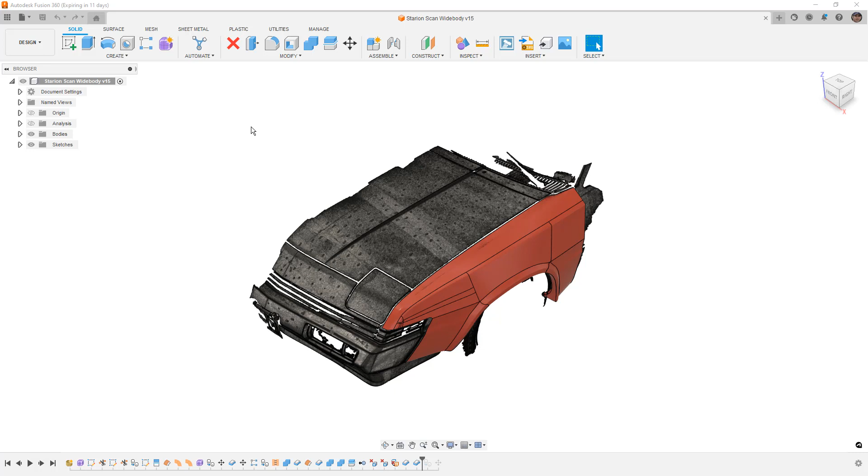I do also want to talk about the fact that at some point in the videos, I did mention that I might just use the 3D print as the fender. That's not going to be the case. I've found that too many different pieces is just not going to be a good solution. However, it is good to glue them together, skim them with body filler, and then build a fiberglass version based off of the 3D print. So that's something to keep in mind, that if you're making smaller pieces, then you can likely get away with 3D printing, especially if it's multiple pieces.

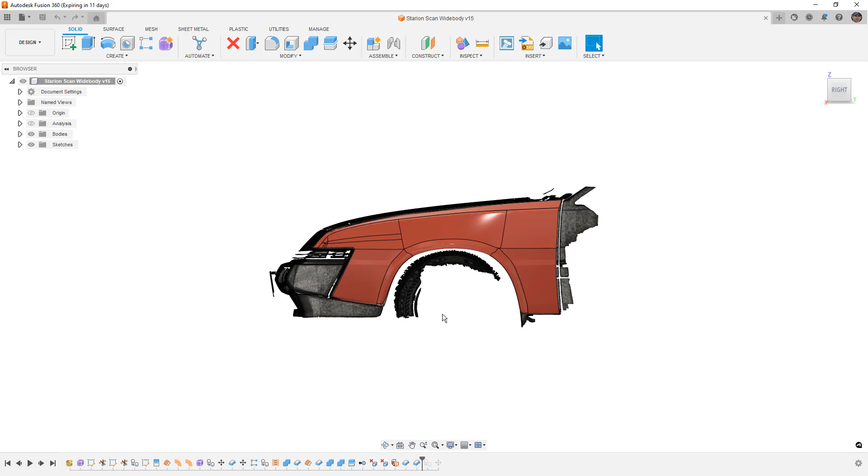Something this big that is essentially structural. I mean, it's not structural in the nature of the car, but it needs to be self-supporting. I don't feel great about having all the different seams on the part. It's just not going to survive, especially talking about two on the front, two on the rear. It's just not going to be a good solution for me for this part.

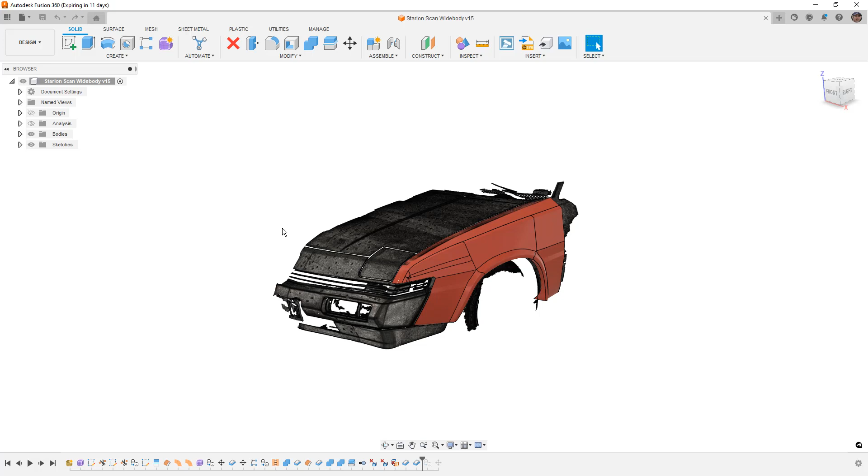And we're going to get started by first going to the bodies folder, and we're going to turn the full fender into its own component by going to right click and create component from bodies. Now, a couple of reasons that we want to do this. One of the reasons is if you happen to be using Fusion 360 as your slicer, which I did print some of these pieces directly from Fusion, then having them as components is important for the arrange functionality to be able to place multiple pieces on the build platform, but also for things like per body presets in the manufacturing workspace. So those are things that are going to be important.

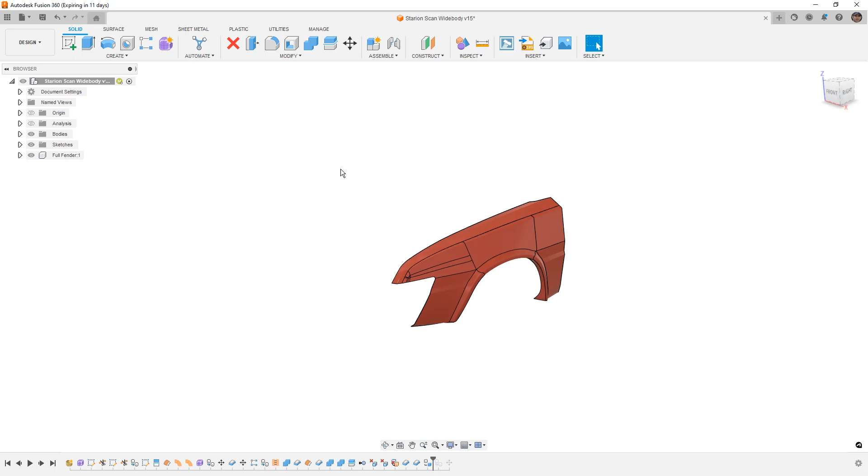If you are exporting this to a slicer, I've printed the rest of the pieces using the Creality slicer, then having components is really kind of, you can take it or leave it. There are helpful things, especially once we start adding features to each of these parts, to having them as components. So I will talk about that in just a little bit, but keep in mind that the main reason for this is if you're using arrange, they need to be components. And when you're working in the manufacture workspace for additive manufacturing, components are preferred over bodies if you're trying to build multiple pieces onto the build platform.

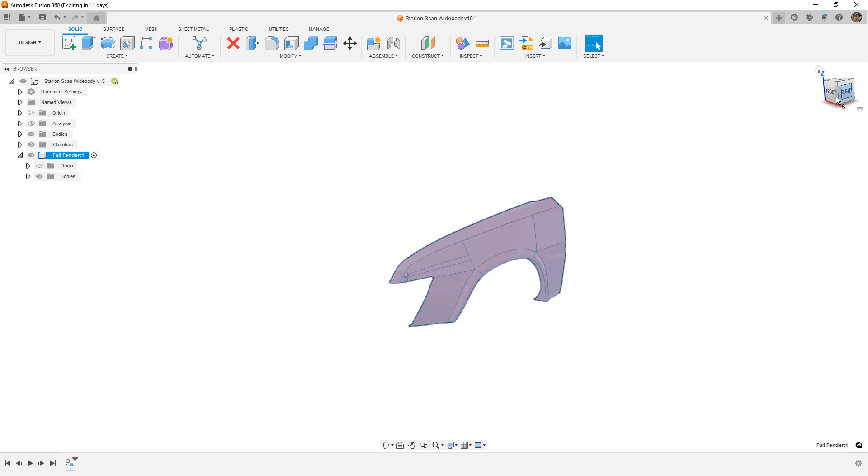With that out of the way, I want to talk about two main ways that we can split this up. So I'm going to begin by activating this component, and I'm going to talk about using a volume to just keep an intersected portion of the fender, or by splitting it up with sketches. So if we're going to use a volume, what we want to do is go to create and either create a sketch and an extrude, or just use the box primitive.

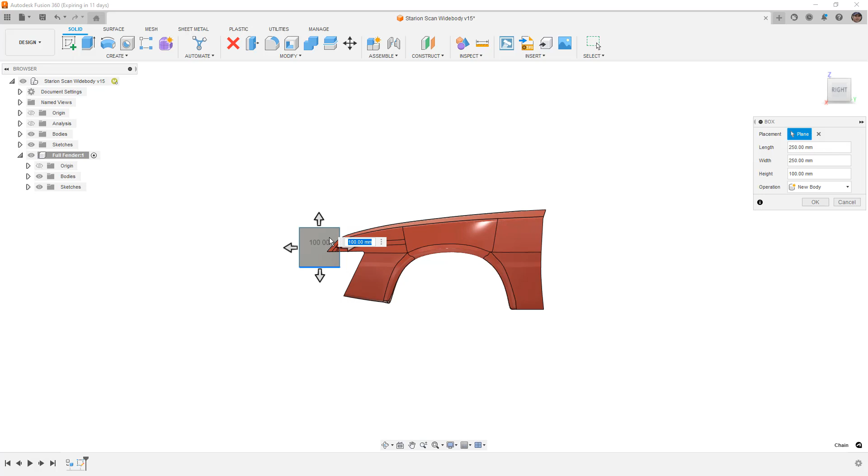The box primitive will allow us to pick a volume, let's say 250 by 250. Now, in this case, I'm using a Creality Ender 7, which has a build volume of 250 by 250 by 300. That's not the size that I would want to print, and I did try it, and it does cause problems. So I would suggest making it just a little bit smaller than your printer. So what we would do then is we would turn this body into its own component. Now, the main reason for that is because when we right-click and we change the opacity to, say, 20%, nothing happens.

Now, if we activate the top level, you can see that the opacity now does change. And the reason for that is because when we activate a component, the opacity of everything else changes, and the opacity of these components needs to be at the top level. So if we right-click and we turn this into its own component, then at the component level, we can change its opacity, and now we can see through it.

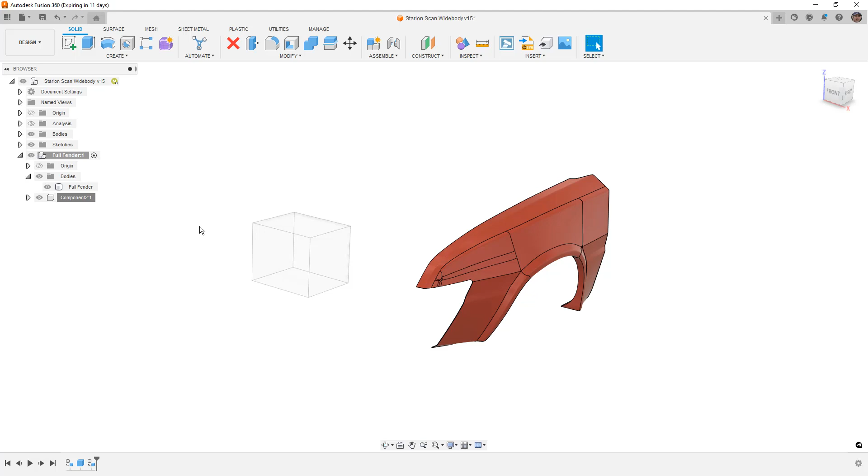So at this stage, what I would do is I would move it around. I would potentially use move copy or rotate. So for example, if I select this component, hit M on the keyboard or select move copy, maybe rotate it 90 degrees. So that way the long direction is along the fender. And then I can just simply move it into place.

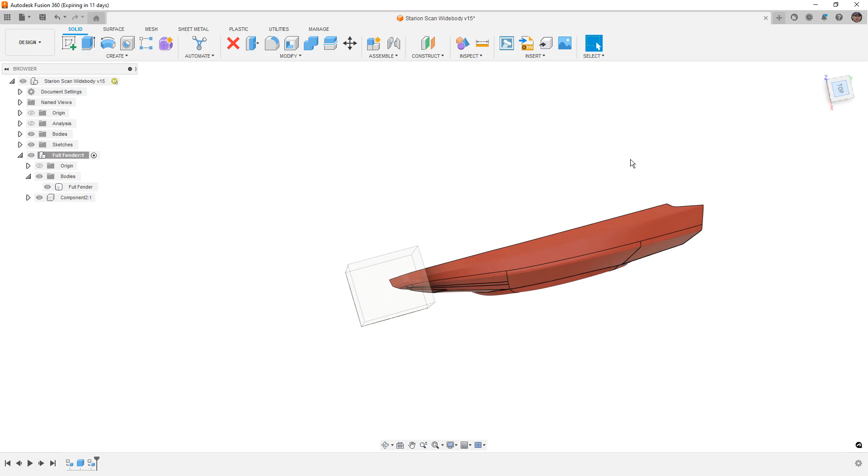Now what we're looking for here is we're looking to build an overlap between the solid. We can pattern this and we can create the whole grid of these that would allow us to ensure that each piece fits inside the build volume. Now the way that we would turn this into just that piece of the fender is we can either use combine or we can use create and boundary fill.

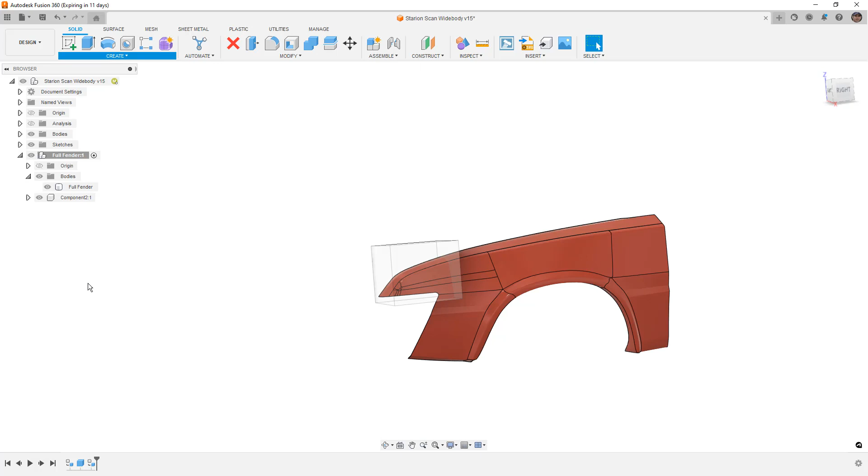Now I have noticed that there are problems with create and boundary fill. So what I'm going to do is I'm going to select both pieces and I'm going to show you. When we go to select the cells, it doesn't let me select this other cell. Now, for whatever reason, this has been broken in Fusion for just a little bit. If you are using boundary fill and you want to keep that inside piece, what you need to do is hold down the left mouse button, and inside of this sort of phantom menu, it changes which component is being highlighted. So you'll need to select whichever one is highlighted for you to keep.

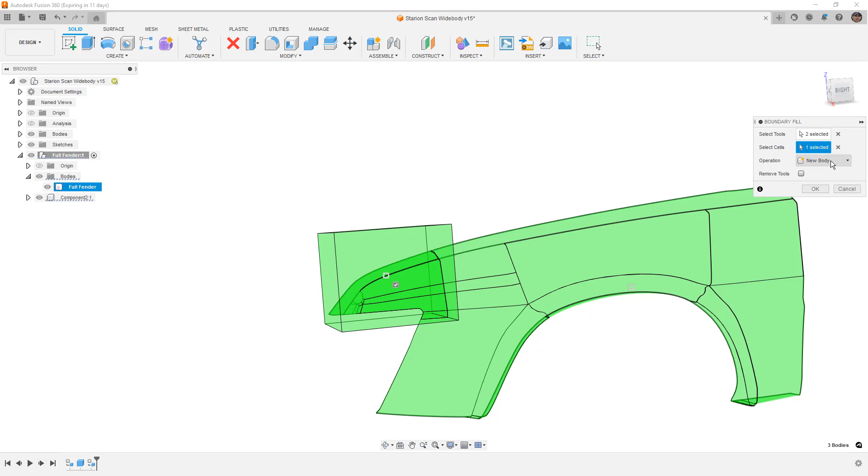Now, the way that boundary fill works is it lets you use things like solid bodies, surfaces, and planes, and you can combine them all to create a new body. We can cut away, we can keep just the intersection piece. But essentially what we're doing is we're building out just that one piece of the fender. So you can see that it's its own little piece, and we still have the full fender left behind. We also still have the cube left behind, but this gives us one piece to work with.

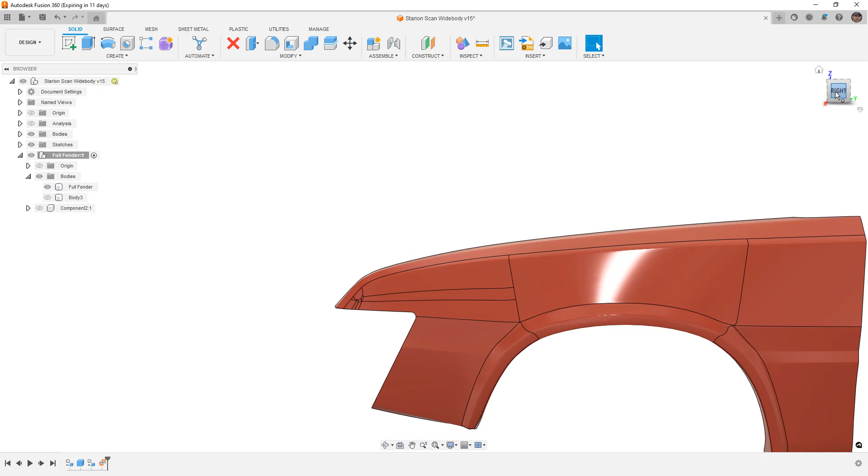Now, as I mentioned, this is not the way that I would break this up. It's just simply not the most efficient way, and I end up with a lot of extra solid bodies in the design, and I really don't like using boundary fill unless I absolutely have to. So the way that I would break this up is by creating a sketch, and I'm just going to create a couple of sketch lines. So I want to create a vertical line that's taller than the fender, and then a horizontal line that is longer than the fender. I'm going to hit escape to get off my line tool, and then use a pattern.

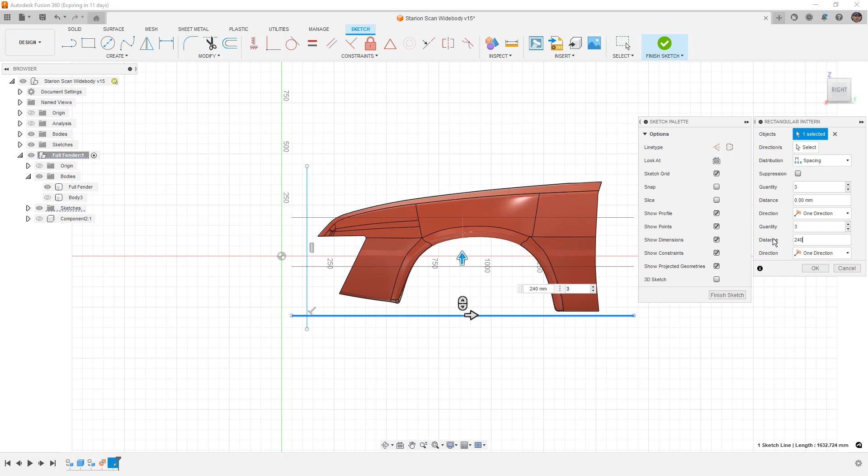Now for the pattern, we want to make sure that we spread these out using a spacing distribution and based on the size that we want. So 250 is sort of the length or width of my printer. I'm going to do a little bit smaller, 240, increase the number, and then say OK. I'm going to right click and repeat this using this vertical line, begin pulling it back, and again, spacing, I'm going to do 290 instead of 300. And just increase the quantity until I get out of the back of the part.

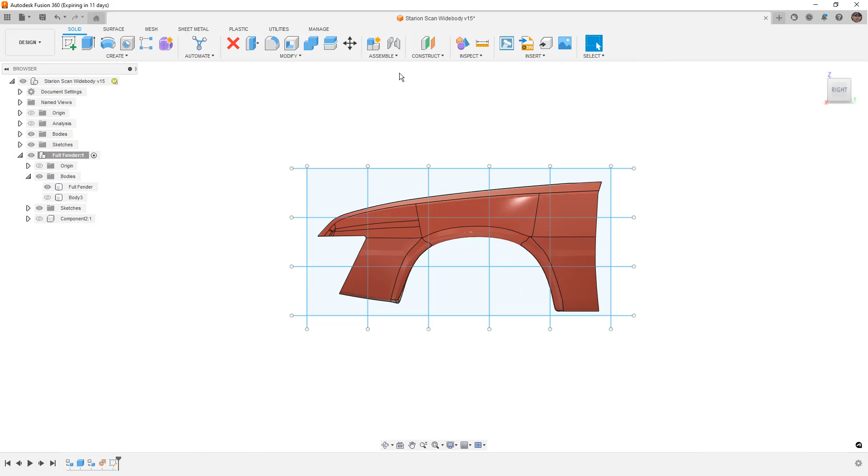What this allows me to do is use this sketch to split up the solid body. Using the split body tool, I can select the fender, and then I can select the splitting tools I want. I'm going to say OK, right click and repeat. I need to bring my sketch back, but this time I'm going to select the 4 pieces that are left behind, and my splitting tools are going to be these vertical lines, allowing them to extend, and say OK.

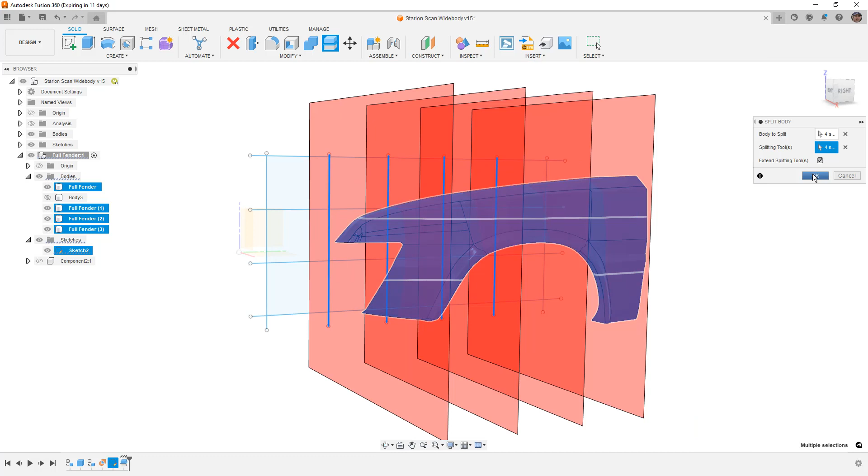Now you do need to be careful with this. I've noticed that sometimes it works and sometimes it doesn't. And what I found is that when it doesn't, it fails. It says there's no overlap or intersection. What you want to actually do is go back and just try to split the body up with one line at a time. See if that works. You might need to potentially move them around.

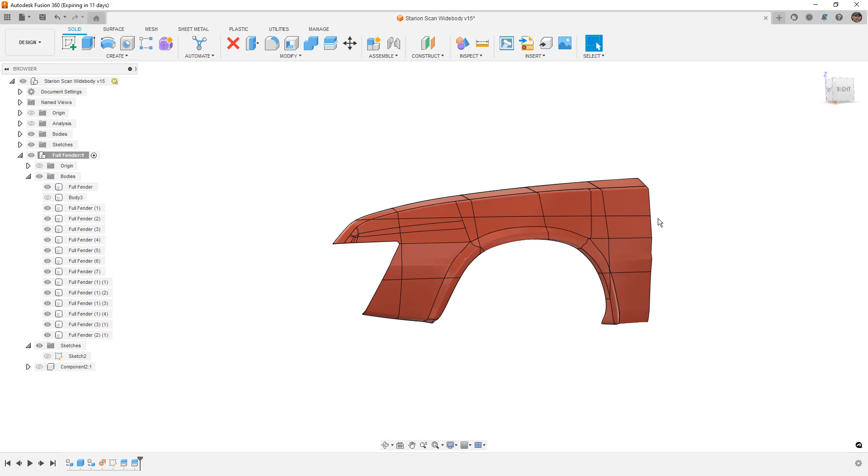But now that we have all of these extra pieces, what I want to do is select all of them, right click, and create components from bodies. The main reason that I do this at this stage is because I can now use display component colors, and it'll change the color of each component in this design.

This makes it really easy for me to look over here and see the color, see which component it is, and visually I can just tell I've broken this up. I didn't skip anything, I didn't miss any steps. Now, if I was going to be using this file for the 3D prints, I would likely come back and maybe move the lines around, but Fusion's going to be a little picky about that, and I don't really want to break this, so I'm just going to move forward with it as is.

So what we're going to be doing is potentially renaming or renumbering all of these. For example, this one here, I'm going to call this piece 1. And then moving my way back to the purple one, I would name it piece 2, piece 3, and so on. Renaming these is going to be important, not only at the component level, but at the body level, especially if you're going to be exporting these to another slicer. You would want to make sure that you do know which component is which.

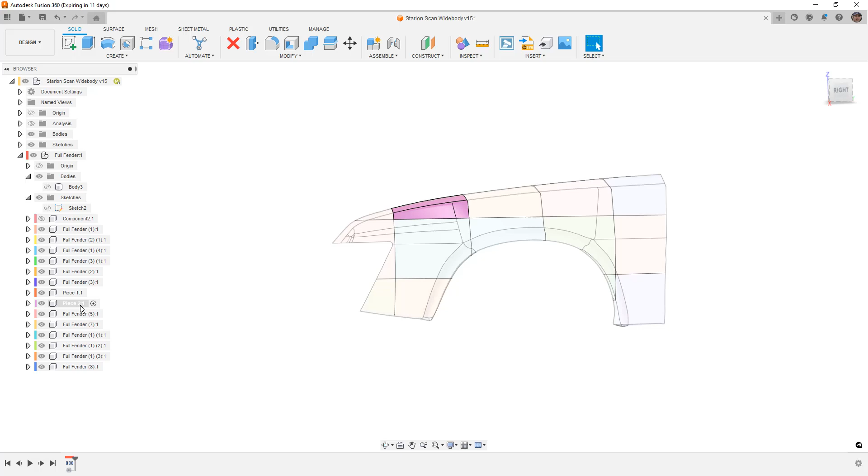Once you've renamed components, it's also extremely helpful to be able to activate them, which again changes the opacity of everything else. We can also right-click and isolate them. This is a really nice workflow. It helps us simplify the process of working with each of these pieces of this fender. As I mentioned, I'm not going to go over all of the pieces because the process is the same. It's just time consuming. So we're going to talk about actually creating some features and the way in which we would want to build this so we could 3D print it.

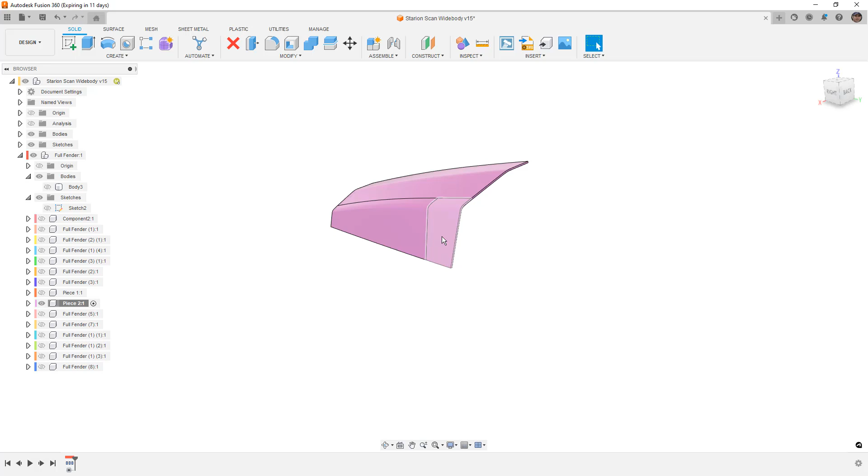Now, it is important to remember that in this case, the part is sitting on top of the fender. So we can't add any additional features, ribs, or details anywhere it's going to have to sit on the car. So keep in mind that we don't have a full area to build. We kind of have to work down in this section here.

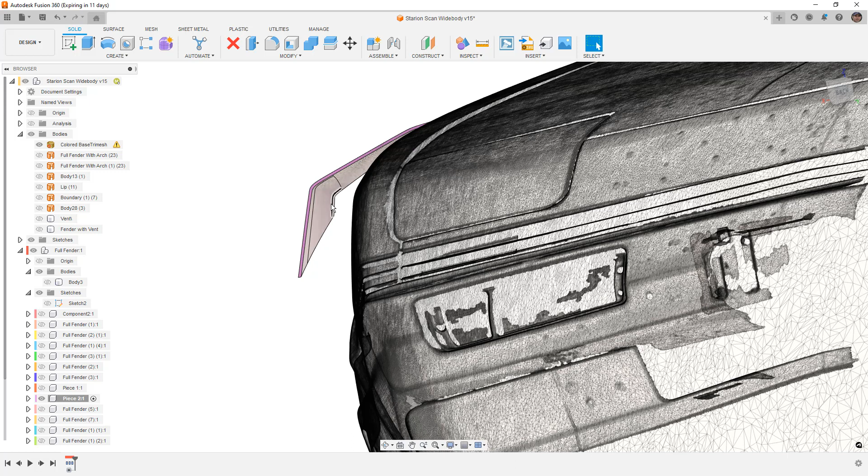Because now it's split up with lines that were going normal to their sketch plane, all of my edges that have been trimmed, this edge here, the bottom edge, and the front edge are all planar, which means that I can just create a sketch right on them. So we're going to right click, create a sketch, double click the mouse to bring it back in view. From here, I'm going to use offset. I'm going to turn off chain selection and just offset this inside edge and bring it in whatever distance we want for a lip or a flange to connect these together.

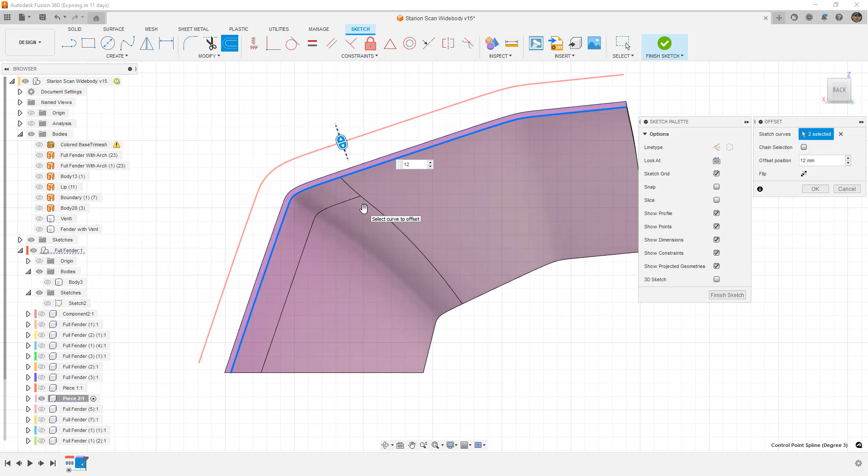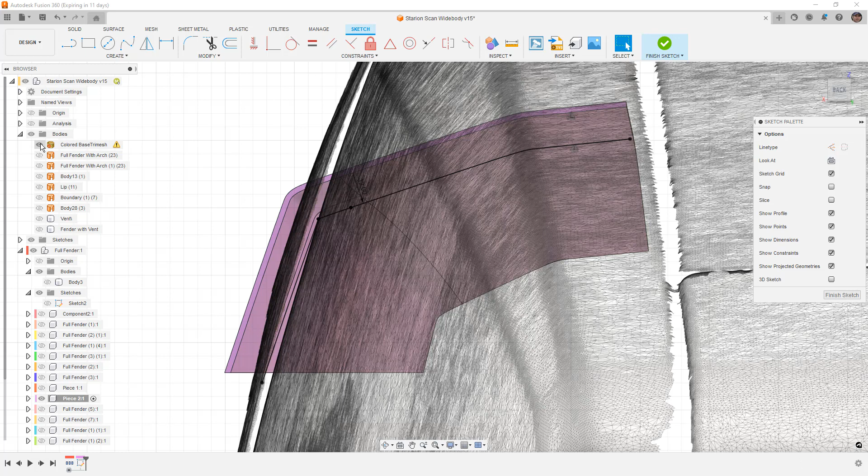Now you have to remember the orientation that you're going to build this in, whether or not you want to add things like pins and dowels, or if you just want to simply screw them together with some sort of plastic screw after the fact, or glue them together. I'm going to be using glue or epoxy to glue them together, and hopefully that will work out okay. If we need to, we can always turn the mesh back on and use slice, which will allow us to slice through the mesh temporarily at that point.

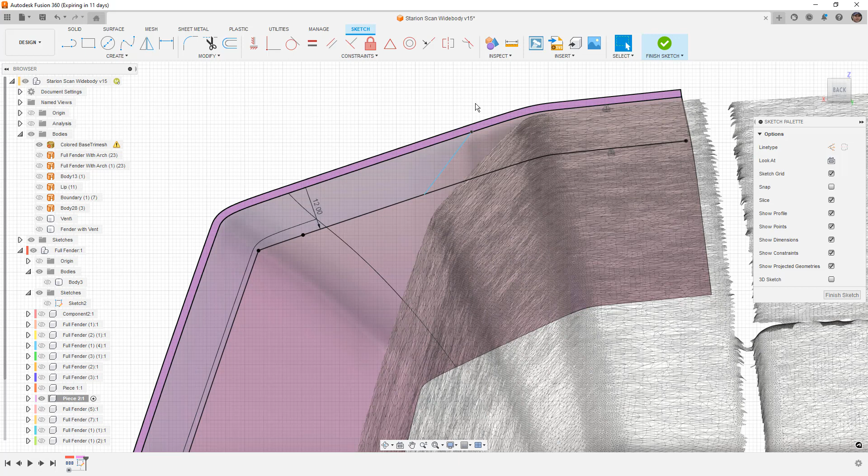And then we can use additional lines. So we want to come out horizontally from here and potentially up here, just come up at an angle that's kind of matching the fender. This gives us an area to just extrude. Now I'm going to add another line that's extending out to here. The reason for that is because now we're able to break these up into those two sections.

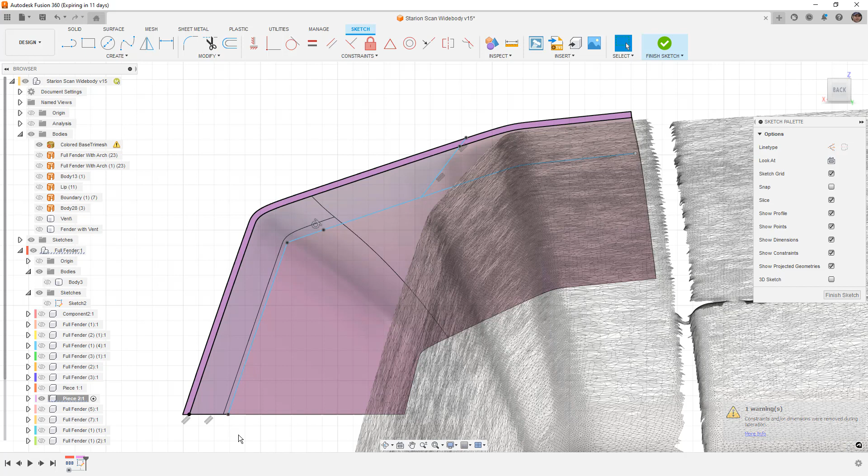I don't necessarily want to worry about trimming these back because these are offset lines. They have a constraint between them. If I trim them, I'm going to end up breaking some relationships, and now I no longer have that offset. You don't necessarily have to worry about maintaining the relationship, but if you want to go back at some point and say, make this minus 10 millimeters, having that still there is kind of helpful. And if you trim that, you're going to break that.

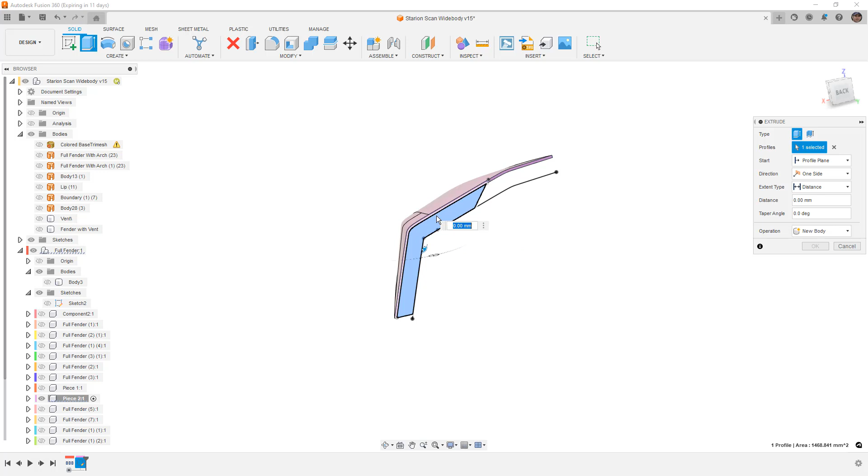So again, it just kind of depends on what you want to do. So I'm going to hide the mesh again, and E to extrude, make sure that I select both of these. And the overall fender is 2 millimeters thick, so I'm going to say -2. By default, it's going to want to cut that away. So you can see it's trying to cut it away.

If we say join, what's going to end up happening is we're adding a little bit of a lip on top of here. So I want to create this as a new body. And when we create it as a new body, this gives us the opportunity to use split body again. We want to split this little piece, and the splitting tool is going to be the fender. Now, you can also go back and you can use the full fender surface, for example, and that can be a great use of that tool.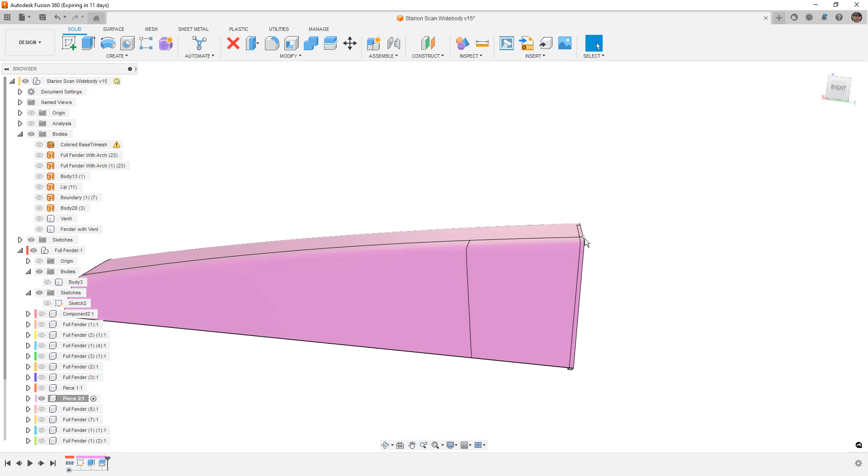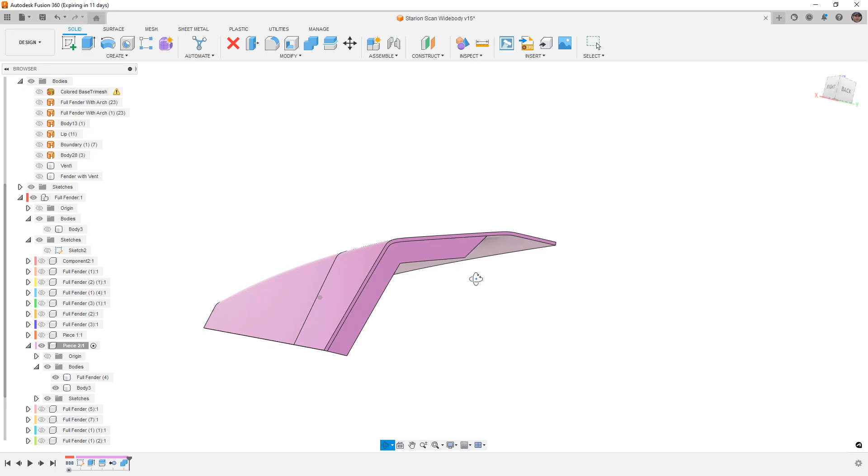Down in our component in our bodies folder, we should now see the fender itself. We should see these little pieces, and we should see this piece here. So what I want to do is take this piece and right click and remove it, and then use combine to put these two together. So essentially what we're doing is we're working our way through and adding these pieces together.

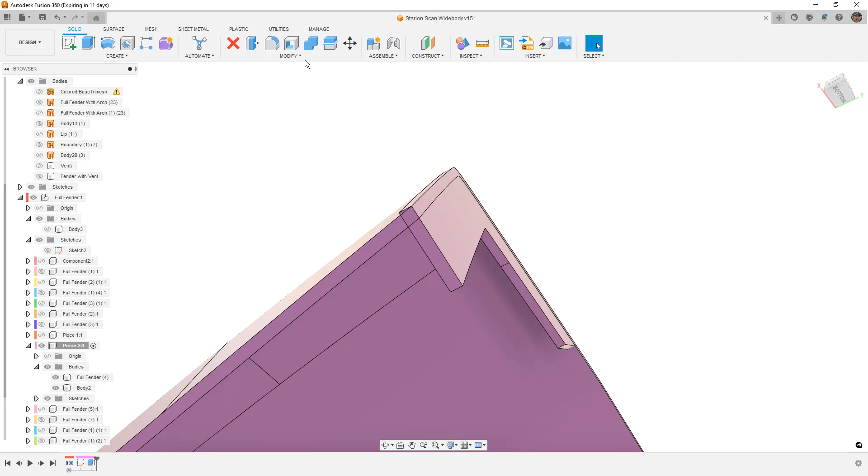Now, if you have any problems, so for example, if these two pieces didn't join for whatever reason, the probability of the surface being the issue, the trim of the surface or the split body of the surface, is something that you need to go back to, especially since we thickened outward. That means that the inside face here perfectly matches that surface. So if that's the case, instead of using that surface as our split body, we would just simply use the outside face of our fender.

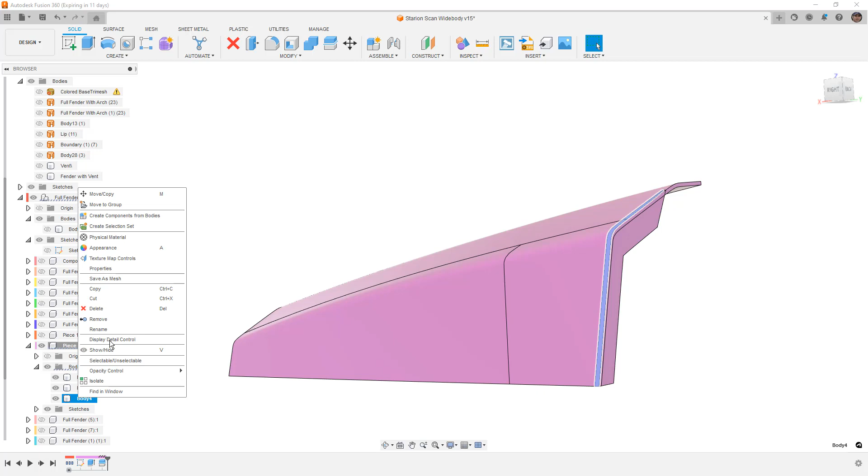Going to allow it to extend. If we want to add additional faces, it's going to cause a problem. So for right now, because this rolls over, I'm just going to say okay. And if we take a look at the bodies, it did remove some of it, but it left a little piece there. So what we would need to do is repeat the split and then use this outside piece.

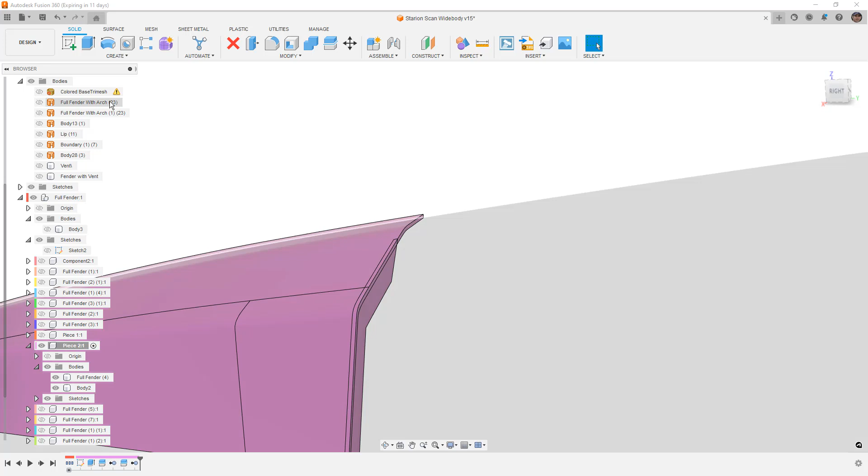The other option that we could have is we could offset that surface, that 2 millimeters, to get the outside of the fender. And once we offset the surface, then we'll be able to use it to trim everything away. Now, if I were going to be doing every piece in this fender, that's likely what I would do. So I have a surface that I can use to trim everything, either the entire direction of 2 millimeters or maybe just one, so it's in between. But again, it depends on your geometry and your parts.

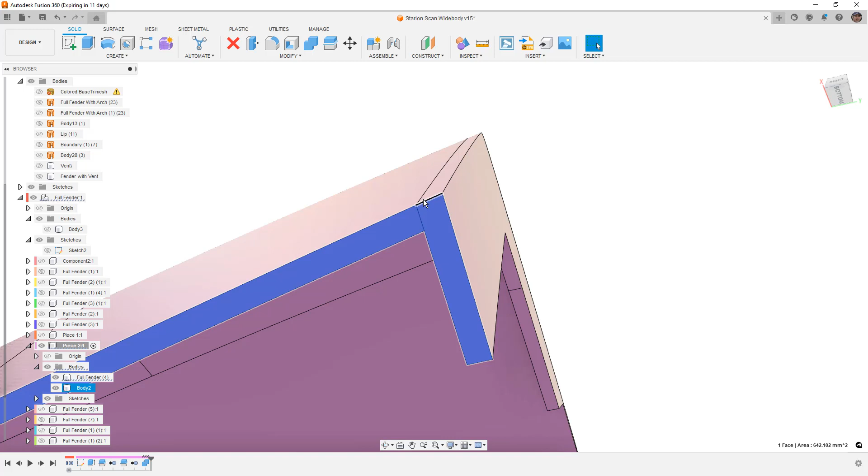Now we can join these together, and we shouldn't have an issue. But for whatever reason, it does not like combining those together. Now, if you do have this issue, once again, let's go ahead and turn off keep tools. Sometimes that can be causing us problems. And now you can see everything looks good. Let's rotate it around, make sure that we don't have anything up here. And it looks pretty good.

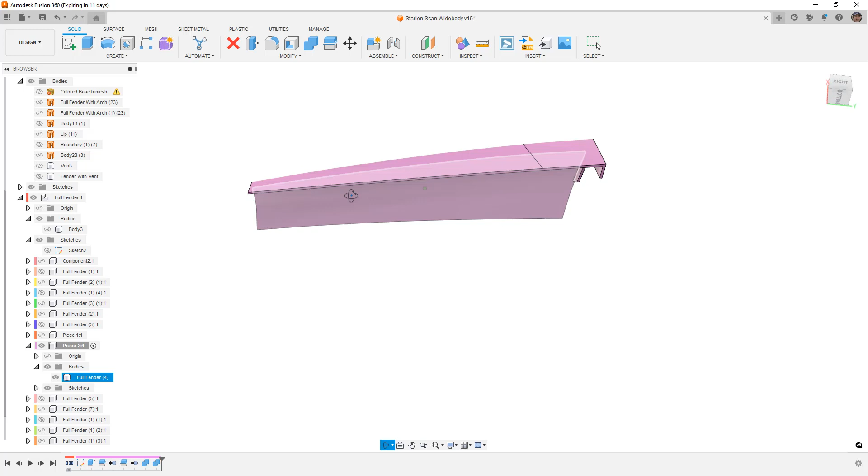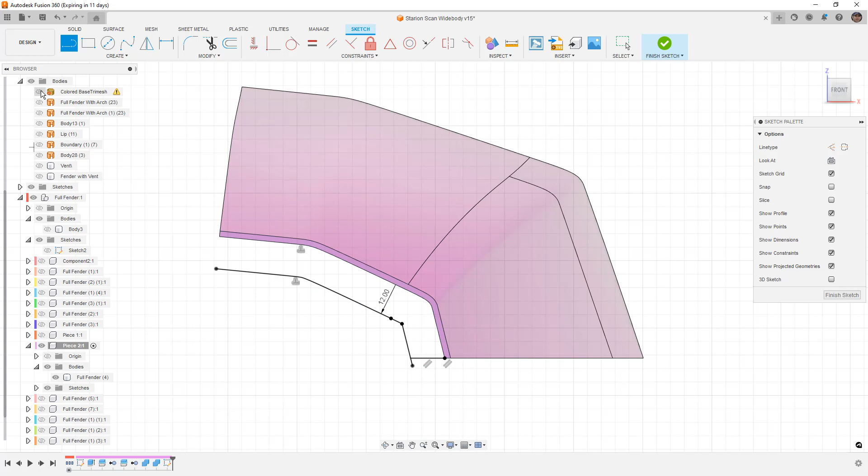So we're going to repeat this process. I'm going to do it on the other side here. Right click, create sketch, double click the mouse wheel, use offset, just the inside edge here. And we went 12 millimeters before, so it's going to be 12 here. Use our line tool, just come out horizontally, show the mesh if we need to, and just sort of bring an edge down where we know we have room, and follow the same process.

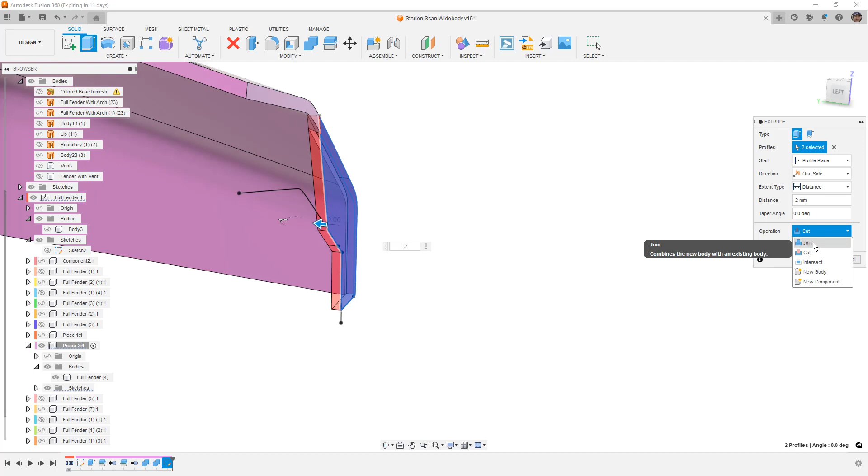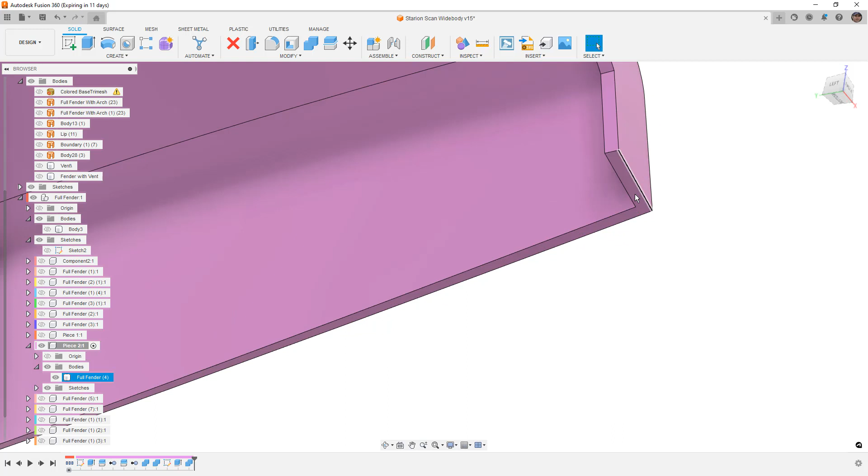And this is exactly why I don't want to do this 15 more times, because each part is going to have, let's say, 3 edges, and you're going to have to do this for each of them. So we're just going to do it on this one part so we understand, create a new body just like before. This time, because the design is tapering away, we don't have to use split body to get rid of it. We can just combine them together. Now you could also do the combine at the very end after you make the flanges on the front, back, and side, but it just kind of depends, again, on whatever your workflow is and what your part is.

Double click the mouse, L for my line tool, maybe rotate it around just a little bit, and I'm just going to come from this point here to that point there.

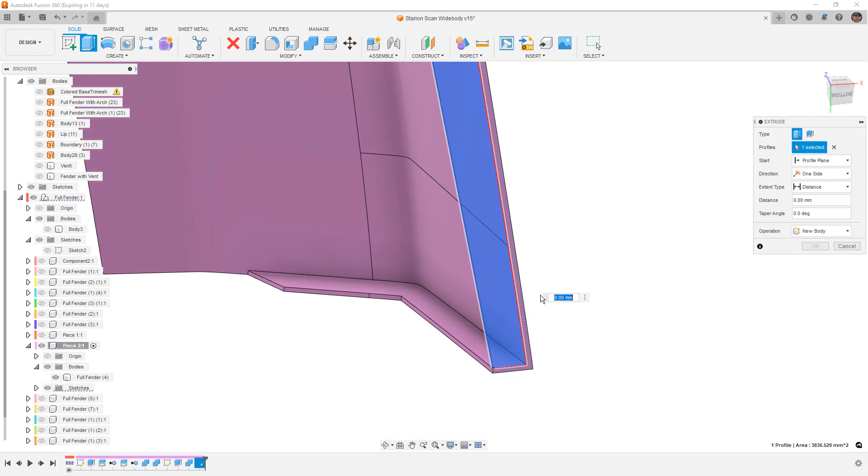Once again, because this is tapering up, I should be able to just extrude this and join them together. So if I select join, it should fill everything in. We will have a little bit of a line here.

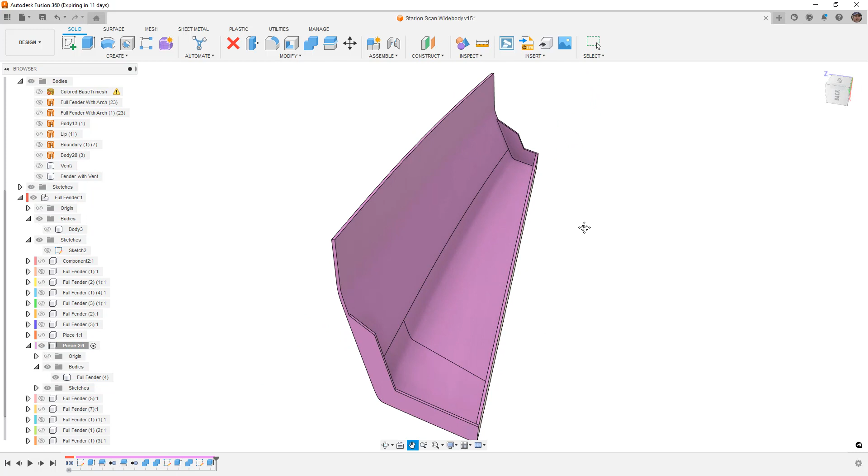If you are really worried about it, you could to do a little bit of work to rotate these faces. But honestly, it's not that big of a deal for something like this if we're 3D printing. If we were trying to make a part for tooling, say a mold, I would not leave it like this. But if we're just doing this to 3D print and send it to a slicer, that's perfectly fine.

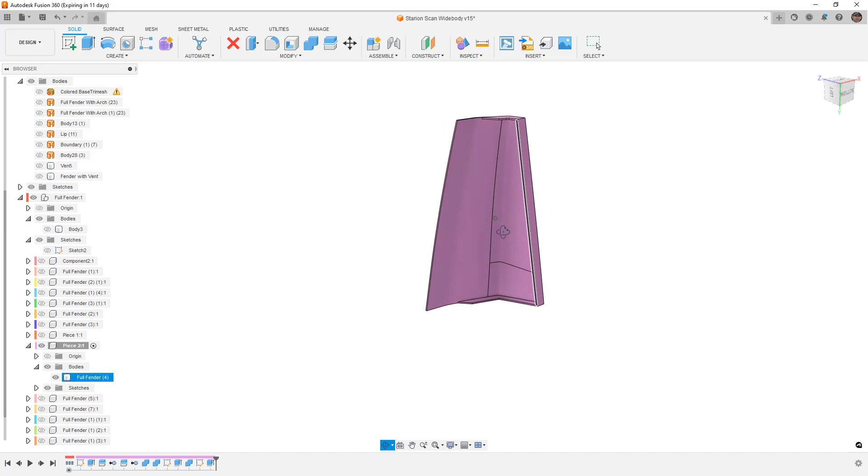Now, if you 3D print this part, you should be aware of the orientation you're going to print it in. For example, I've been printing parts like this, and the reason is because I wanted each of the layers to be able to follow the curvature of the part back and forth. If we were to print the part like this instead, our layer lines would be different and wouldn't necessarily follow the contour.

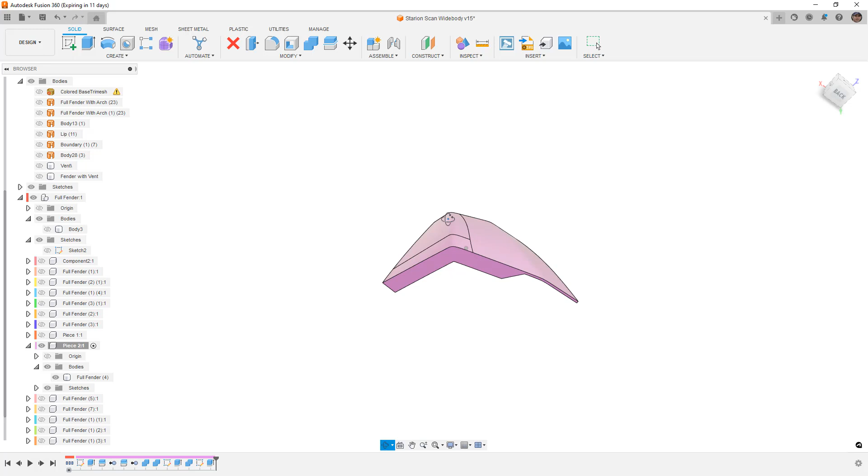So if you're printing something like this, you have to think about how you're splitting your parts up and how you're printing them. Because if you change the orientation of the parts, one getting printed vertically like this and another maybe printed like that, the resolution of the way the 3D printer builds those layer lines is likely going to cause an issue for you.

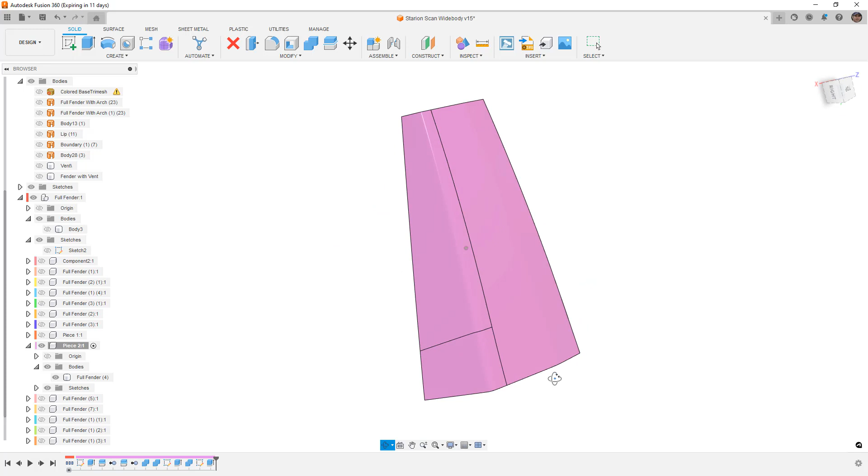I've been trying to print everything without supports, which obviously is problematic for vertical faces like this. So in some instances, what I've done is actually extruded that face down, or used things like move copy on the face, reset the pivot point to, let's say, here, and potentially rotate the face.

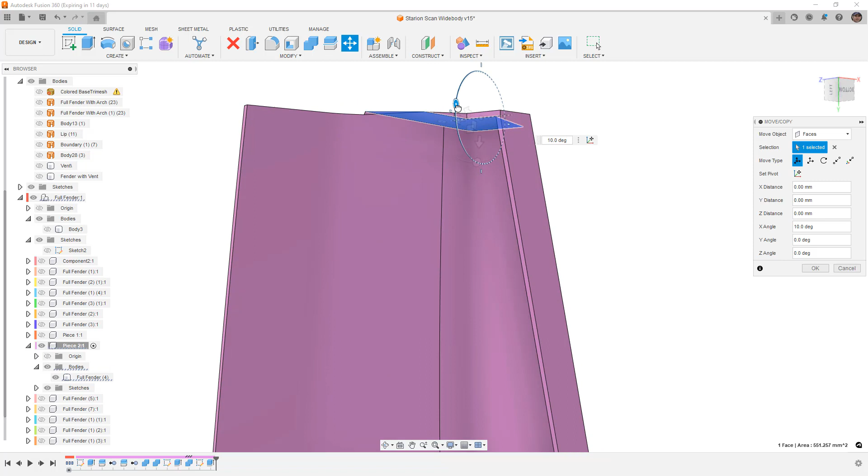Now you can see that it's causing me problems. I'm going to reset the pivot point over here and see if we can get it to rotate.

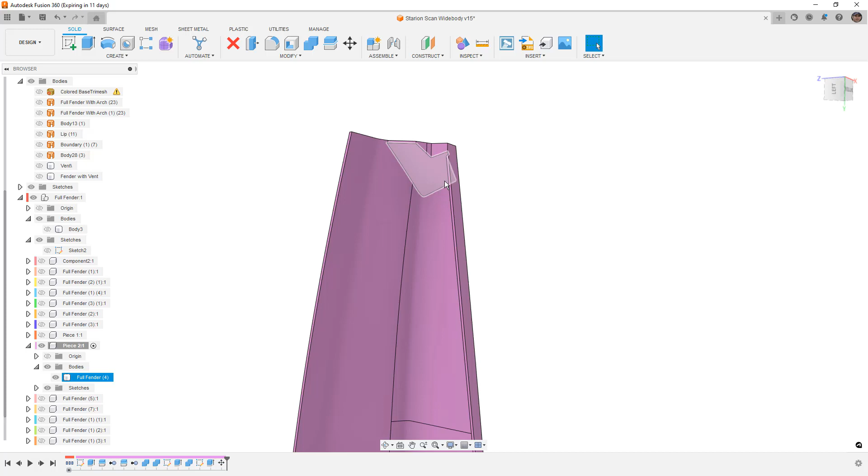So basically, it ends up building a very thick region up here, so you would want to use some sort of infill. But what we can do is basically add a taper or an angle there, so that as it's building, we don't need support material coming all the way down. Or you can use some custom on-model supports, building them up at an angle, just enough to build this top face flat.

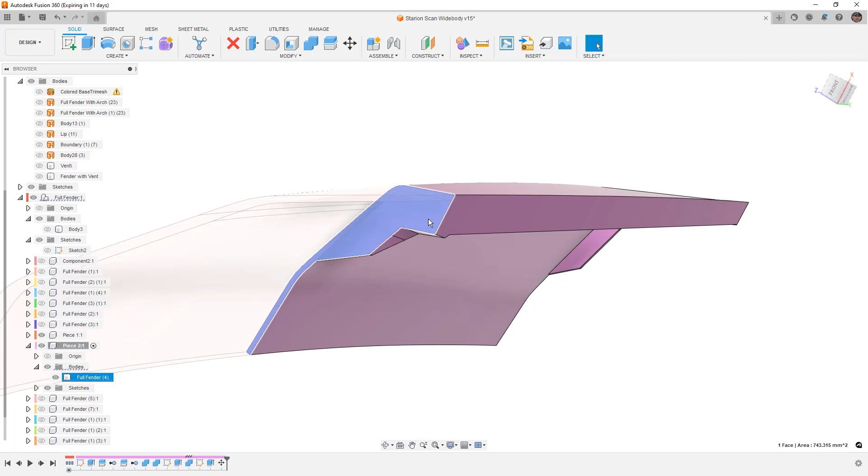But if we bring back piece one, we would need to repeat this process for it. One benefit is that you can reuse some of your sketches. For example, we could reuse that sketch, extrude it forward, and then we'd have to use that split on the outside in order to get it to work. But again, that's the basic process we'd go through to split these pieces up in order to 3D print them.

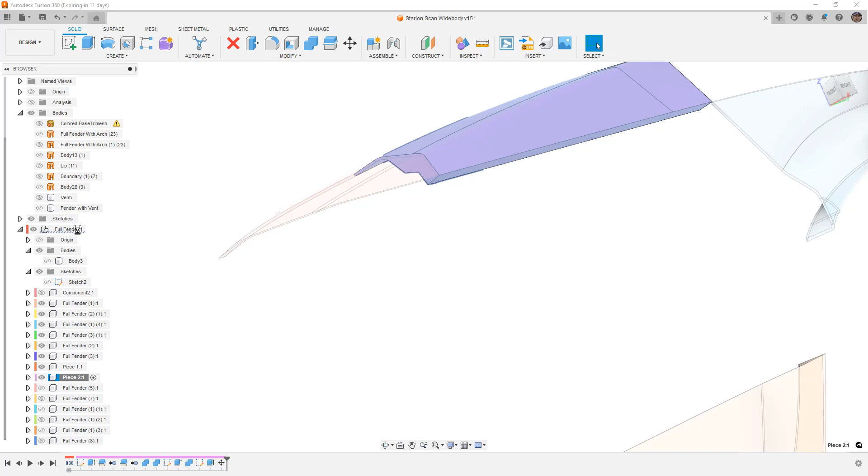What I'm going to do is right click and select unisolate, which should bring back the rest of my fender. All of these components are underneath the top level component, full fender. So if we activate this, the opacity will go back, and now we're left with all the different pieces of the fender.

Now, rotating it around, you can see we would need to build a feature on the top of this one and the sides. And this piece I actually ended up splitting right about here, just because it was much easier to print without this little piece hanging off. So that ended up working out a little bit better.

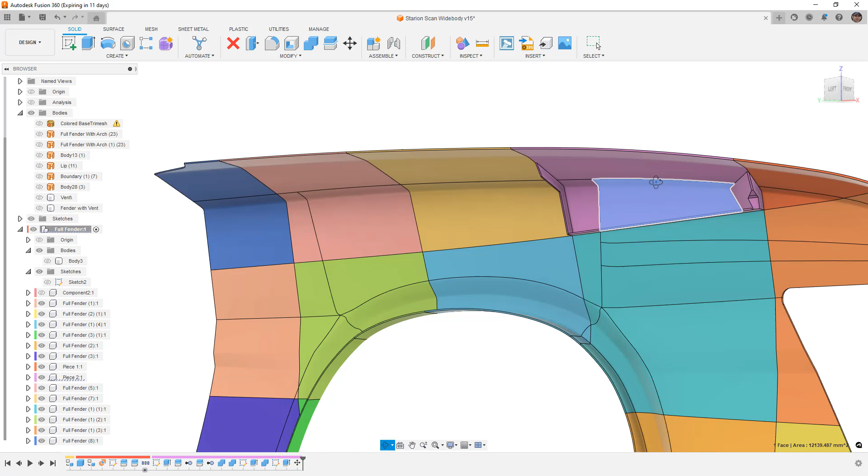As I mentioned, these larger pieces up here I've had trouble with. So this purple piece here, and this yellow piece, I've actually been splitting them in half, making them even smaller, because they seem to print okay until about 5 or 6 inches off the bottom of the build, and then they start to have issues. They start to get knocked a bit, and we have temperature issues being that far away from the build plate and so on. So again, it all depends on your 3D printer and how you're working on these parts.

But I've noticed that's been my biggest issue - these things getting too tall and having issues.

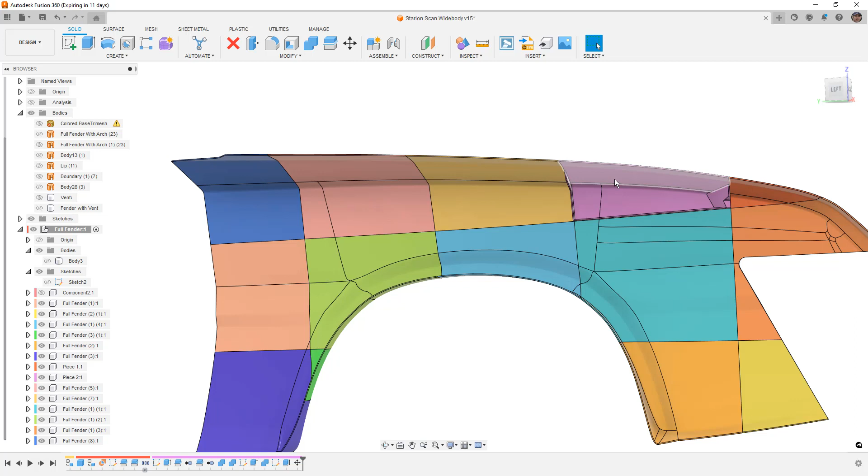This piece here, I ended up printing quite a bit thicker, actually probably about 12 millimeters with 10% infill. That way I was able to keep it a bit more rigid and it worked just fine. It's just a lot more material and a lot more time to build, but it ends up being pretty rigid.

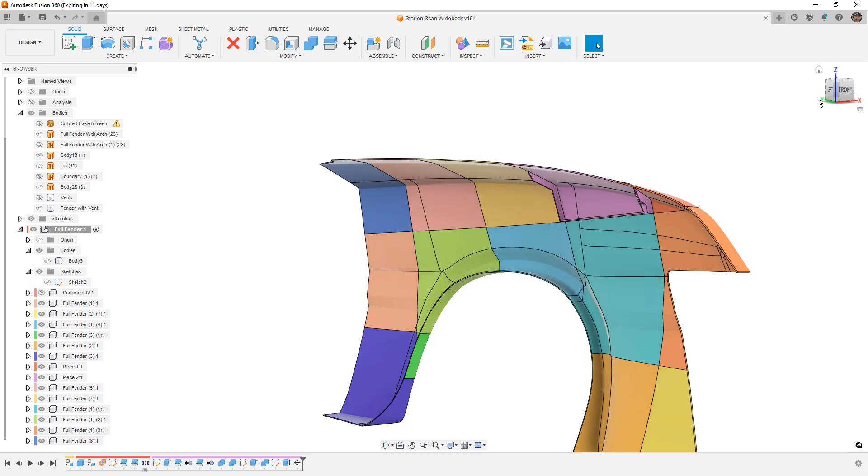So at the end of this, if you're following along and doing this for your own design, your own fender, whatever it is, you have to consider that end goal. Always have to think about that end goal. Are we going to be using this 3D print? Is it just going to be the basis to make sure visually we're on the right track? Or are we going to use it to build a mold or a plug out of? All of these things come into play and come into mind.

Now, for my scenario here, I mentioned originally I thought I might be keeping the 3D print, and it might be okay. I just don't think that's the case, because there are too many seams and too many pieces. Even with this Ender 7, which is a relatively large 3D printer, it's just not going to be a good solution. Now, if you do have a printer that's big enough to print an entire fender, that might be a different story. You can get good materials that will work. You then have to worry about deformation of the part over the length of it and what kind of accuracy you need.

But for me, probably the best option is to either attach this to the stock fender and create a fiberglass mold, including all the mounting points of the stock fender, so that I can replace the entire fender with this one, or something similar — epoxy this all together, put body filler on the outside, make it smooth and ready to create a mold off of that, which can be used as an over fender.

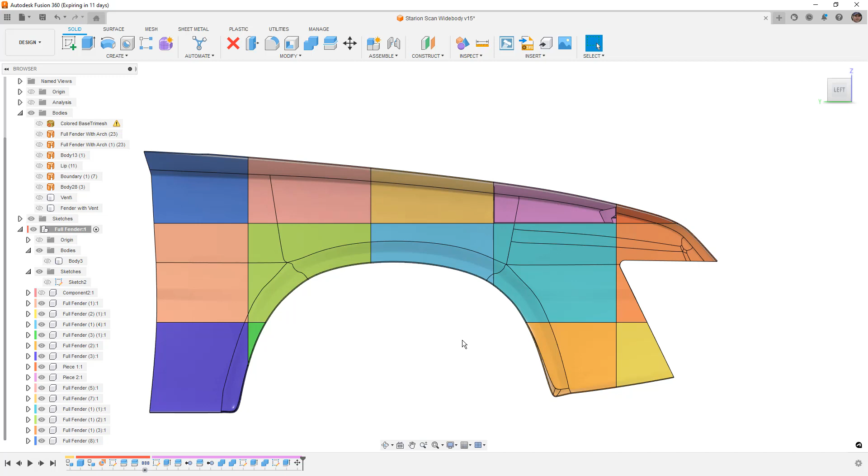So I haven't really considered which option to go with yet. I'm not 100% sold on the design. I need to do the rear as well and spend some time just making sure that I'm happy with the shape and the direction for this car. And ultimately, once I decide that, then I'll determine what the next step is.

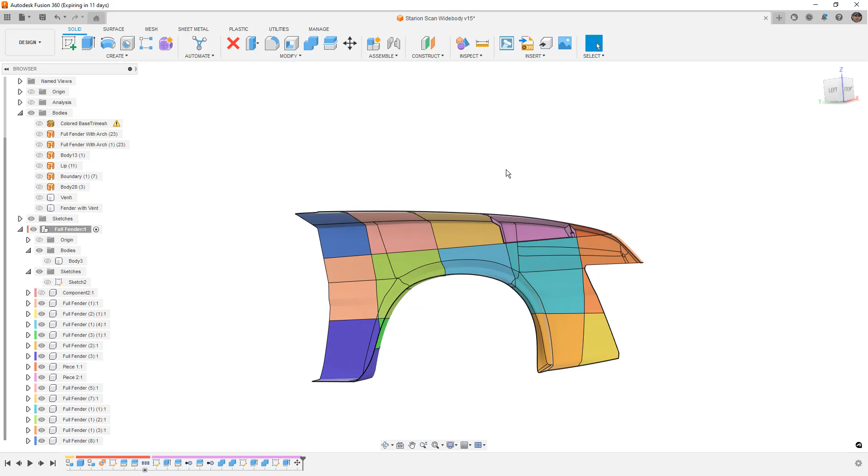But as far as this video, I think that's as far as I want to go with the setup, because as I mentioned, it's just very time consuming. I don't expect anybody to go through the process of doing this. I've done it to all of the pieces, and as I mentioned, I've 3D printed most of them up until close to the midway. Mine are broken up a little bit different, but I've got most of this front half done. I just need to get the rear half done and on the car so I can take some pictures of it.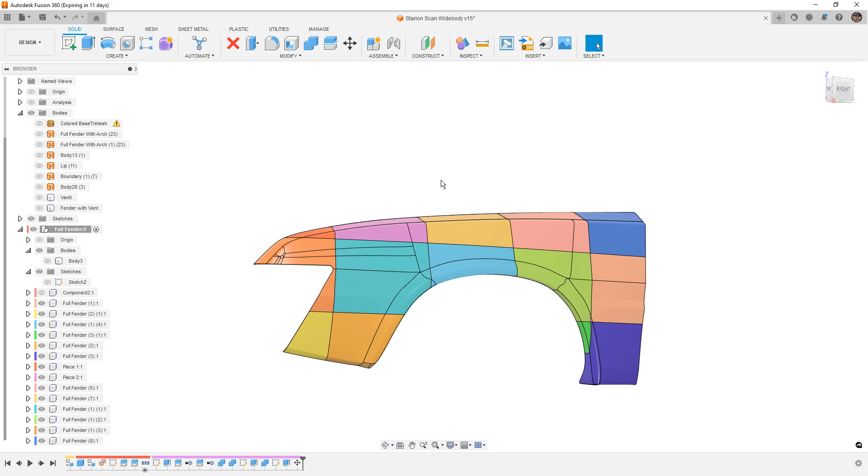And I probably could have spent 10 more hours on this before even getting to the 3D printing stage. There are other things I would want to change about it and potentially go back and do. For example, I probably want to incorporate some sort of lip or spacer that takes up the space between the fender and the car. It fits really well on the bumper here. All that stuff fits pretty well.

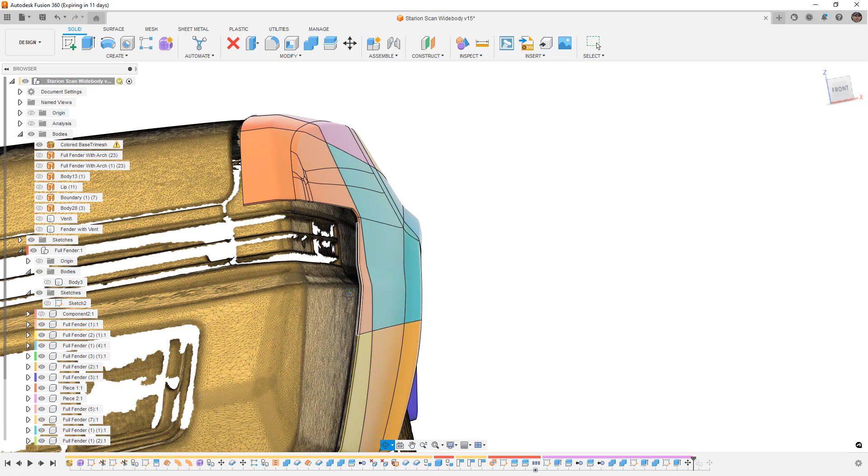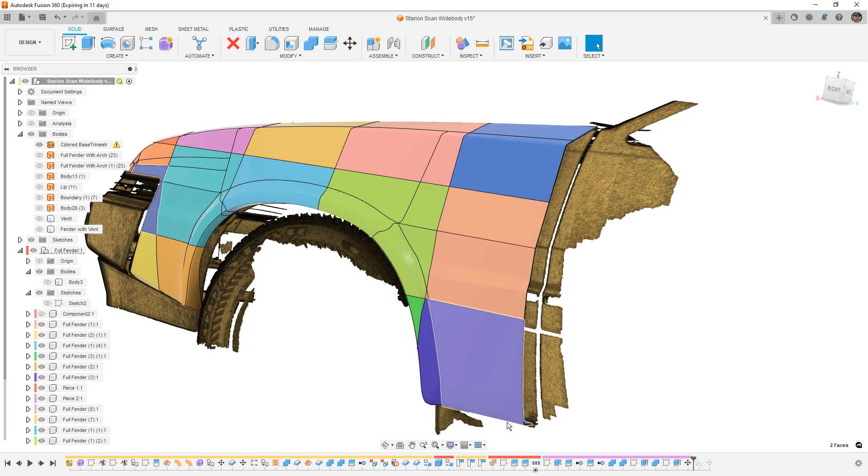But the benefit of 3D printing this is that I can reprint these two pieces and have that incorporated without having to redo the whole thing. So it gives me some options. And when I get to the back for these pieces, what I'm likely going to do is split this up so that there's a thin section, a couple inches, at the very back. That will let me play around with adding some different features, venting and things like that back there, just until I'm happy with the overall design and shape.

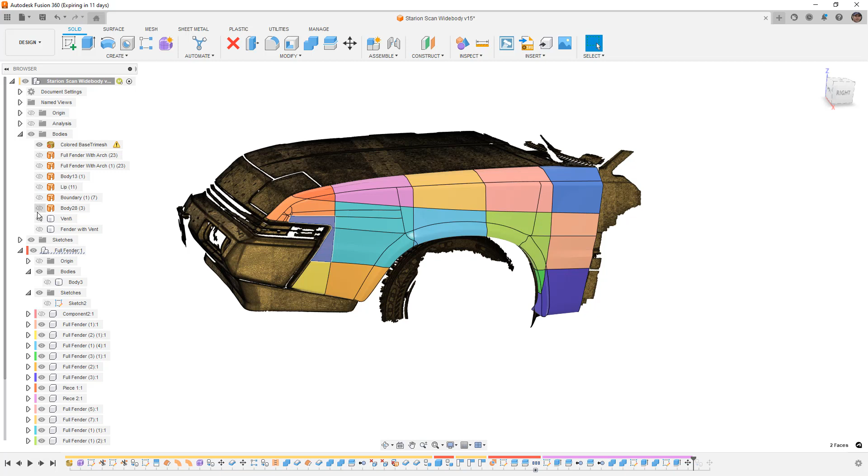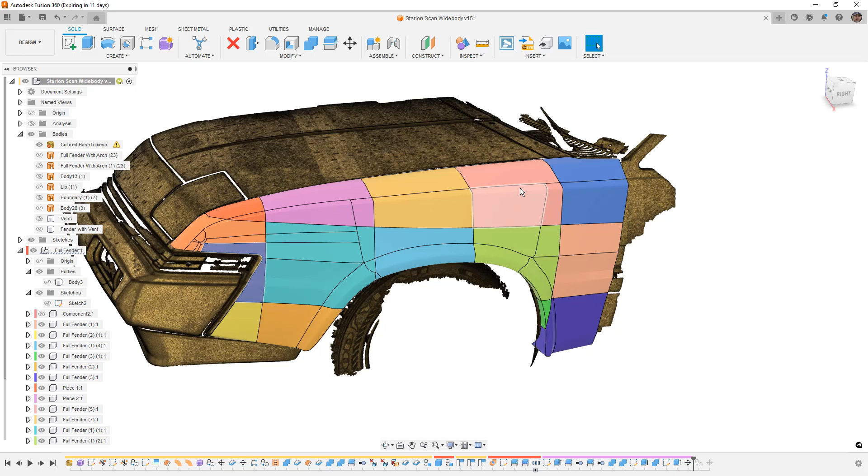Using that sort of methodology gives me more flexibility to see how those different pieces play and how I like the shape. Again, with the vent, that was done in a way where I could reprint some of these pieces. I didn't go forward with the vent in this case because it would require me to hack the stock fender up quite a bit just to test if it would fit. Unless I'm 100% sold on the design and end up making an over fender or a complete fender, it's really not worth the effort at this stage. I could always cut this open later and add that. But again, it's just the things we have to think about.

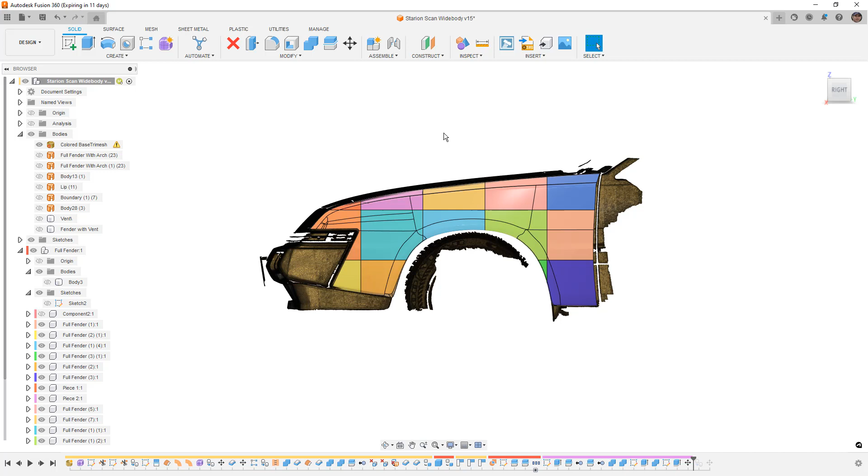Something I want to mention is whether the time spent here is going to produce a great result in the end. Obviously we were able to get the shape relatively quickly—within an hour or two in forms we could have something to look at and determine whether we were happy with the overall shape and design. With that in mind, it's really important that you get a good handle on the shape first before you spend any time on the details.

If the basic shape isn't right, the details aren't going to make the difference. You have to be really happy with that basic shape, and you have to be willing to scrap it and go back to the drawing board if the design calls for that. If you get to a position where you're not happy with it or the shape isn't working, you have to take that step back and continue working with the design.

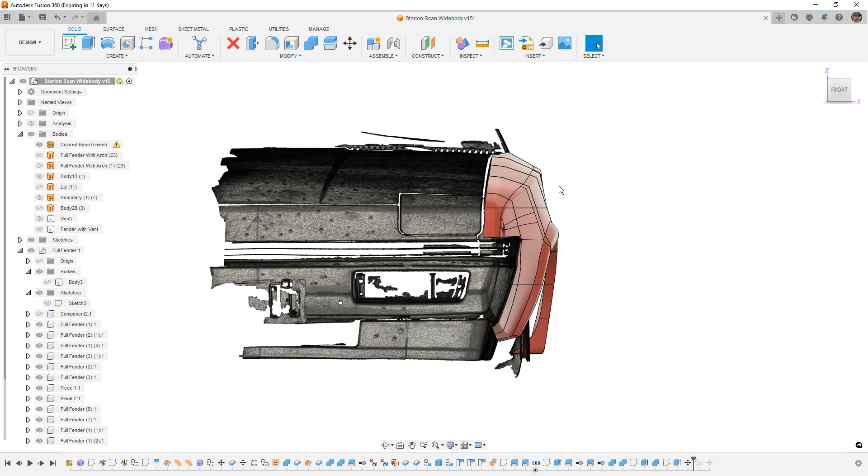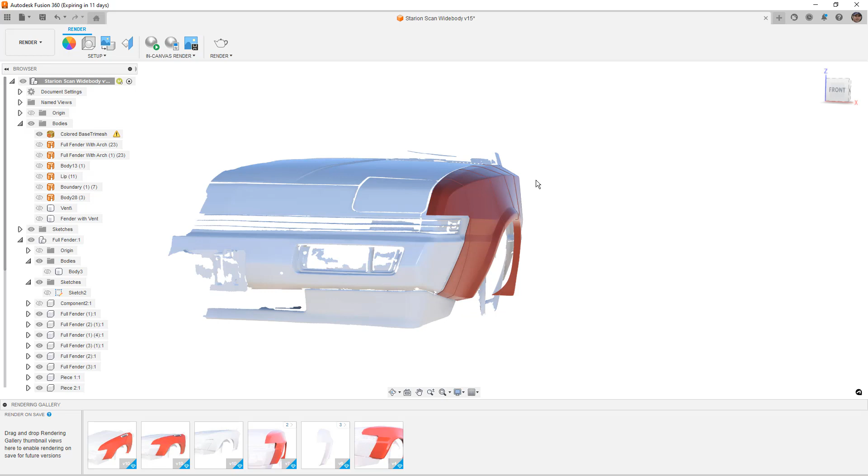In this case, I do like the way this looks. It's not that I'm unhappy with the shape—I'm just not 100% sure it's going to work on this car. So that's what I'm waiting for, until I get the 3D print on the car in reality. Then I'll really know if it's going to look right, and it won't really look right until it's lowered a bit with the right wheels and so on. Overall, this fender is probably quite a bit wider than it needs to be, but that's not necessarily a bad thing—it's just something I need to see on the car to really help me visualize.